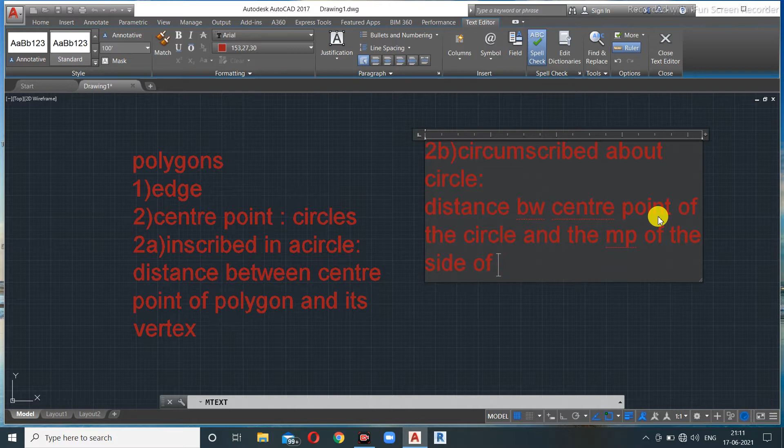Okay, so these are the two types of polygons that you can make with the help of circles. So whenever you take the polygon command and want to make a polygon with the help of circles, the command line will prompt you to give the radius of the circle within which you want to make your polygon.

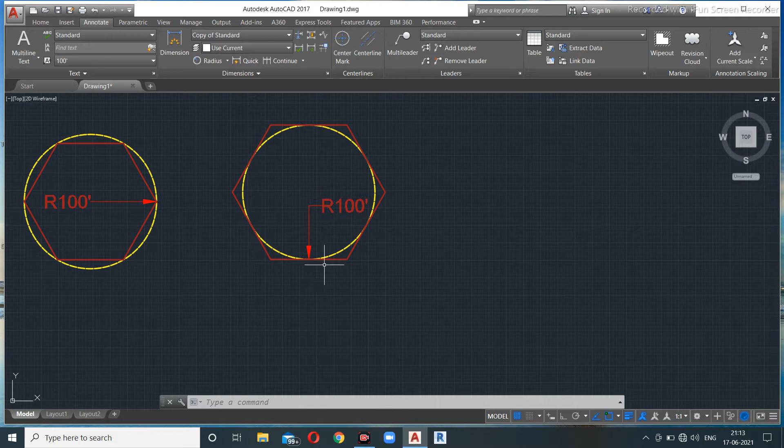Now let's go into the command. The command for polygon is POL. This is the command for polygon. And what else you can do, you can go here, in your draw panel, below rectangle itself the polygon command appears. Now for example I want to make an 8-sided polygon, so I press 8 and enter.

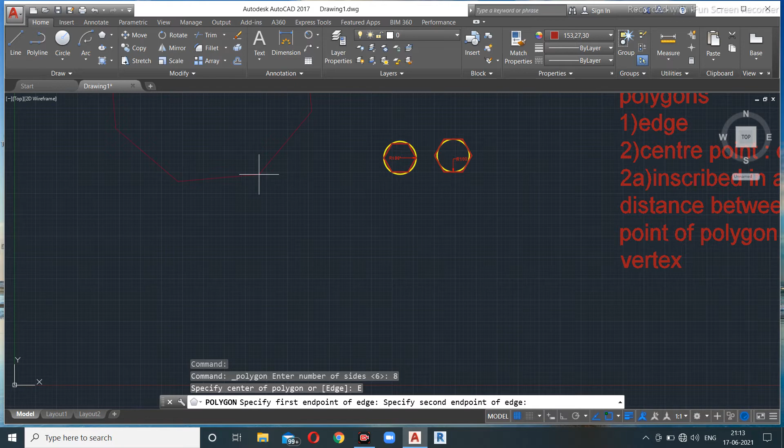Now I can give the second endpoint manually, or I can put a distance here. Suppose I want this to be of 200 feet. Enter. Here you go, this is your octagon of edge 200 units. Now you can just see it here.

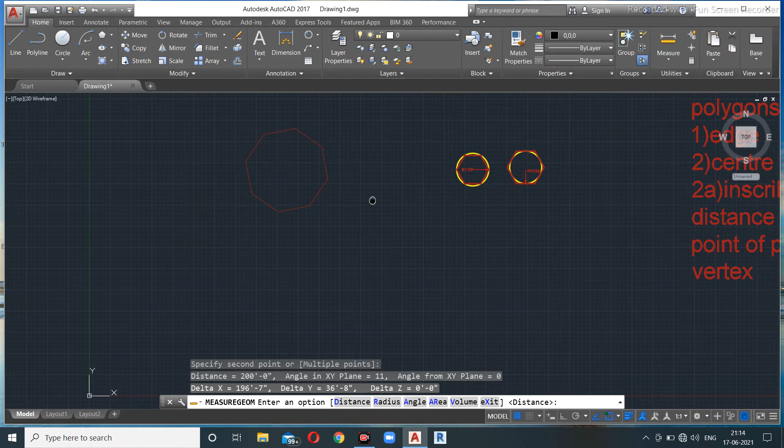Now with the help of these circles. So first I want to make an octagon. Let's press enter, and I'll give the center of the polygon, let's say here. And now I'll select inscribed in a circle, that is this type of circle.

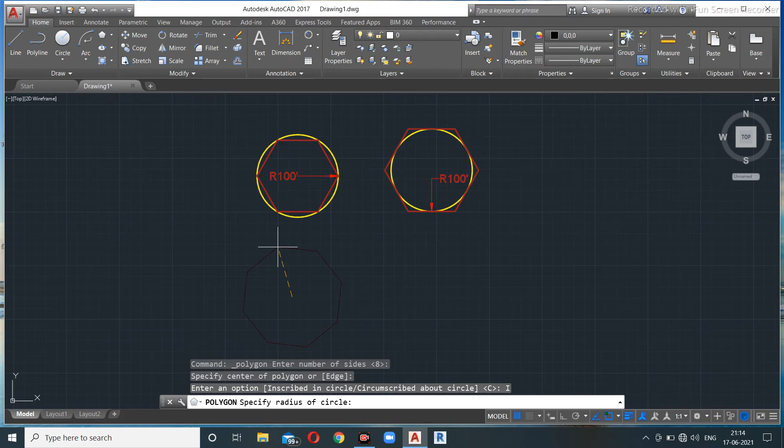Now again I take this polygon command, give the sides as 8, give the center point here, and now what I do is put a center point here, and select circumscribed about circle, give the center point, and give the radius of the circle again as 100 feet, enter. Here you go, this is the circumscribed about circle.

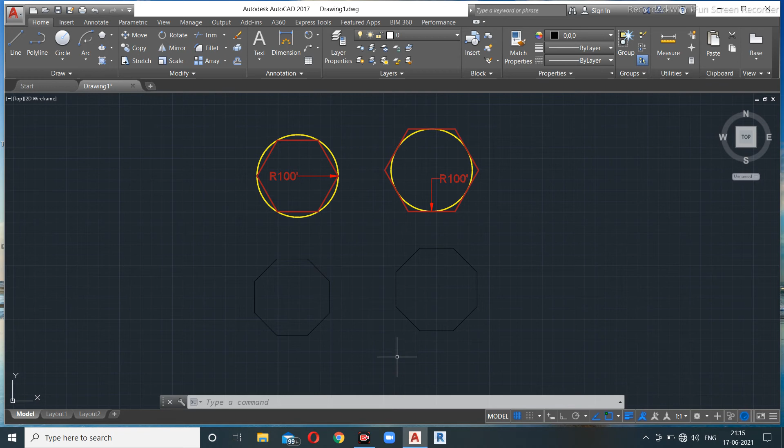It is also apparent that the polygon made from inscribed in a circle command is smaller than the polygon made from circumscribed about circle, because that's obvious, it covers a larger distance. So this is how you make polygons in AutoCAD.

You can also make a square, you can make a rectangle. Let's make different sides of polygons. Now I want to make, let's say, a square of 4 sides. So I give just the center of the polygon, and now I give inscribed in a circle, and see, I can make a polygon like this. Okay, so this is a square.

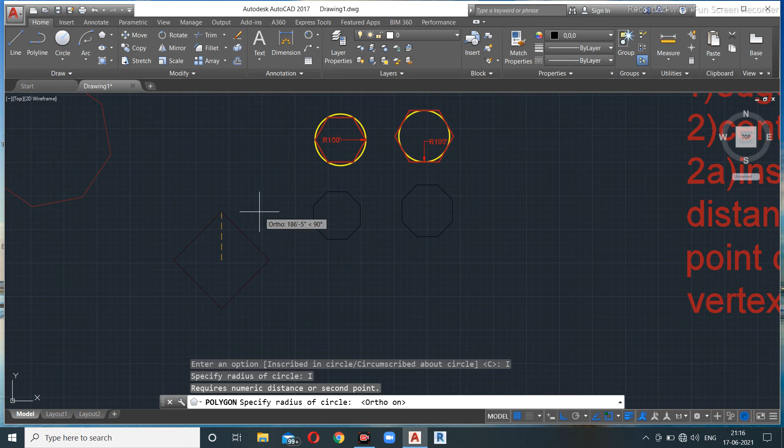I'll keep ortho on, and here we go, see, it'll be made like this. Or what I'll do is take a polygon again, give the number of sides as 4, and give edge. So I can give the first point here, the second point here, so I can make it like this also. Other than that, we can also make a triangle.

Okay, let's say 3 sides, enter, and now I'll give the edge polygon. Okay, the first point, second point, this is how you make it.

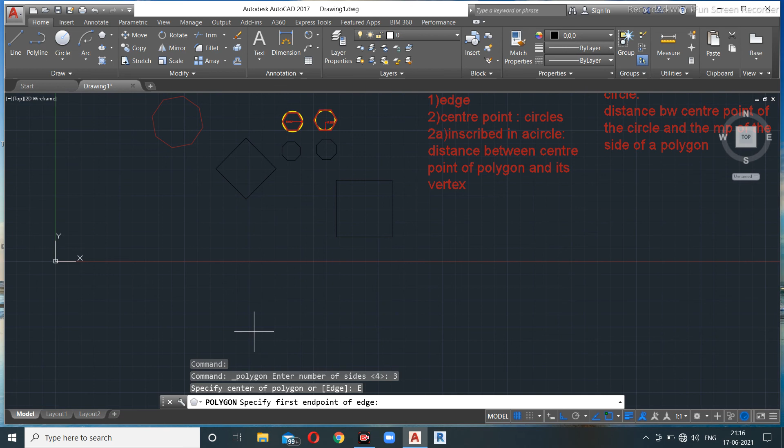Okay, now let's say we want to make a polygon of 1025 sides. However, I told you that AutoCAD only accepts polygons up to 1024 sides. So let's try to make it. We'll press 1025 and enter. Here you go, it requires an integer between 3 and 1024. So these are the limits of making polygons in AutoCAD.